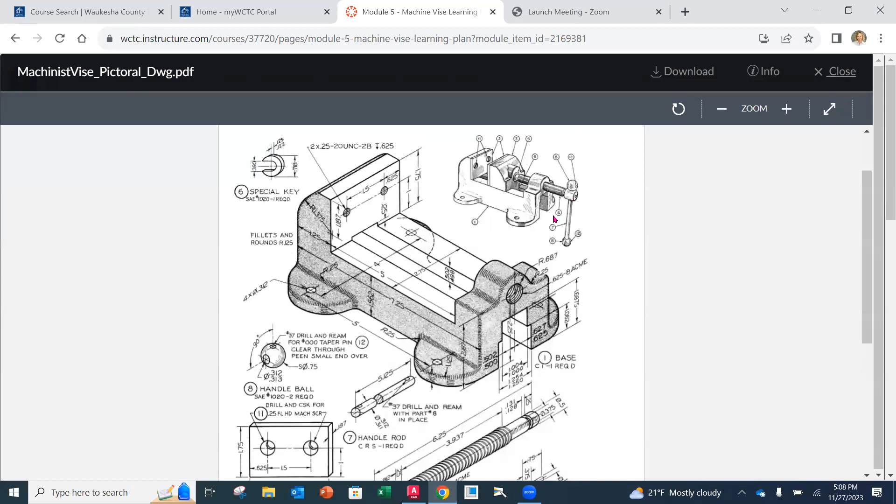But basically, I'm gonna go on the pictorial of the machinist vise. We are creating the assembly, and most specifically, all the models and the details for each one of the pieces to put this machine vise together. So using what you know about the ANSI standard, what you know about Creo, pulling this all together and creating a good set of working drawings so that this vise can be manufactured and assembled properly. Okay, so that is our goal.

The main thing here is applying good modeling techniques as well as the ANSI standard when it comes to dimensioning. So that's what we've got on top here. These are basically drawings without the dimensions on. So if you wanted to sketch them out, these are basically the views, so that you kind of know how to lay them out, and then you can add any notes and such that you want to it. And at times we might be looking back at these as well.

Additionally, these have the part number, the title block filled in with all of the material, which is also going to be on your pictorial drawing as well. Okay, so those are there for you to use as needed. As we look down here, it says you want to create the models and the corresponding detailed drawings. Each one of the models you need to save as the part number.

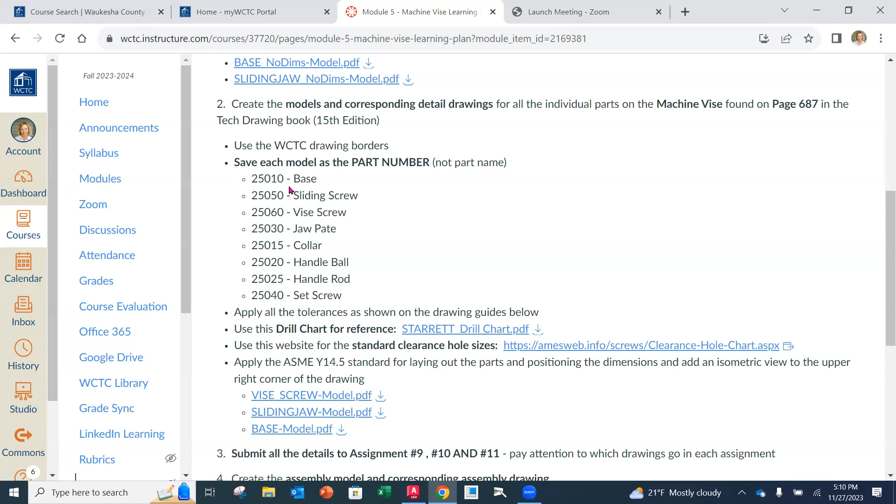So I'm kind of saying this again to you guys. Don't save it as base. Save it as 25010, okay? Because the title block is programmed to use that file name for the part number in the actual title block. If you call it base, it's going to have base where the part number is supposed to go. The base is going to be in the part name, which you'll actually key in when you pull that border in. So we've done a demonstration or two on that, but just make sure that you're saving each model as their corresponding part number here.

Okay. Apply tolerance as shown in the drawing guides below or in the drawing here. Something I want to point out is that there are some single place decimals and no place decimals on a couple of the dimensions on the machine vise. What I want you to do then is use the 2 place decimal in our title block, because that's the fewest number of decimal places and the least precise dimension. So convert anything that doesn't follow a 2 or a 3 place to just a 2 place decimal. Okay.

That's that stuff. There's a drill guide there. Oh, here are the 3 guides that I'm giving you. All right. So you've got the vise screw. You'll notice that all of the dimensions and everything are on here to the ANSI standards. So what you want to do is basically duplicate what's here for the most part.

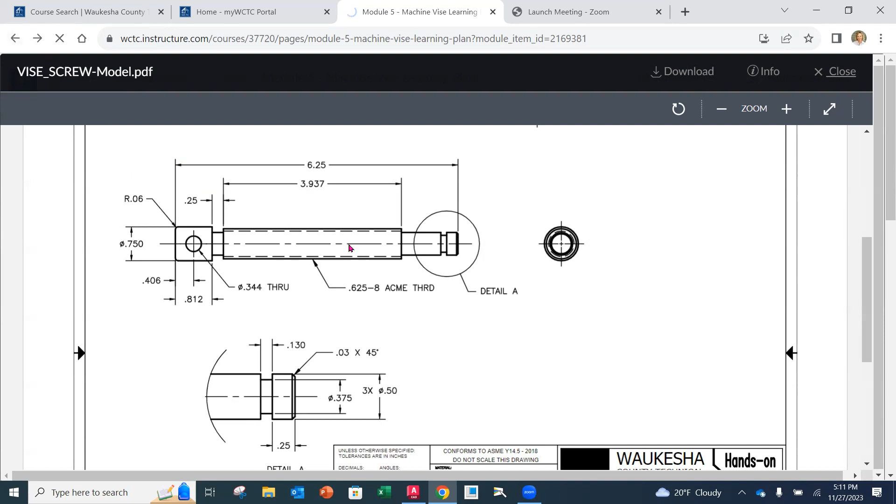You'll also notice that the next one that we have is the base and the sliding jaw. These are probably the 3 most complex parts in there model-wise. So I wanted to give you those because there's quite a few dimensions, especially on the base and the sliding jaw. There's also a section or 2 in there that you want to be aware of. But the other ones, you get to choose how you're going to do those. All right. But make sure you're applying the ANSI standards.

Submit all your details to assignments 9, 10, and 11, and make sure that you pay attention to which drawings go in which ones. All right. Create an assembly and a corresponding drawing that we'll get to once we go over assemblies, and submit that to assignment number 12. But assignment number 12 is not active at this time because we haven't gone over assemblies yet. So we're focusing right now on the details.

So, a couple things that I want to talk about. As I've been getting in some of the assignments, I want to be sure that we're all aware of a couple things. Number 1, I did have to add new borders out here. I apologize. I don't know why, but it must have been on my part.

In the background, there was something like a bearing block or something. And if you pulled it in, it would say there was an error because there wasn't this bearing in your working drawing or working directory. I think when I saved it, I mustn't have cleared my session and it was hanging out in the background and it was part of it. So I had to redo the borders, which was fine. It was no big deal.

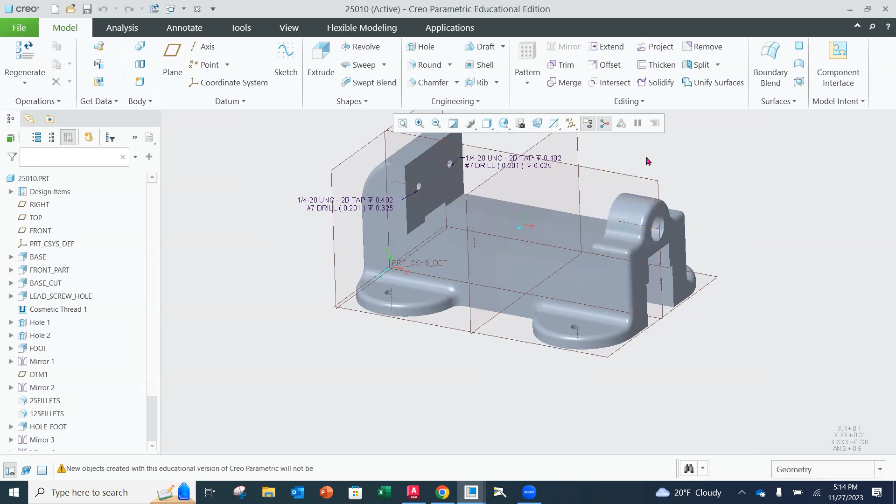And we're not going to model the threads so that they're the actual threads. You would do that, for instance, if we would 3D print this, and we'd want to have the actual threads in there. But for drawing purposes, we want to show them just in simplified format. So how we're going to do that is we're going to model the actual hole that's in here just like this. And then we are going to capture cosmetic threads: once the hole is in there, you go up to Engineering, and down below it's called Cosmetic Thread. And we're going to go to Standard Thread.

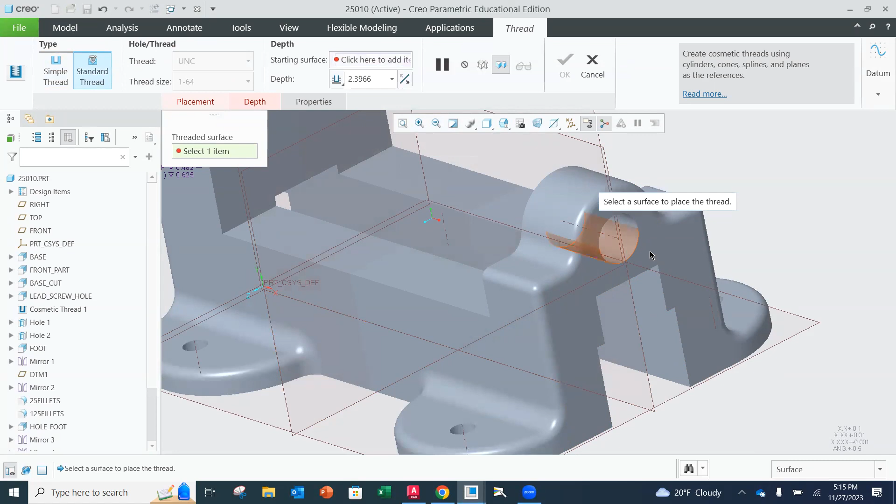Then it's asking us to click on the item that we want to create as a cosmetic thread. All I do is grab the face here. I left click on that face. And then it activates so that you can select the thread type. You want to just do a UNC. They don't have Acme in here, which is fine, but we're going to do a UNC because when we are in our drawing mode, we want to show those hidden lines for the root diameter of the thread itself. And then we're going to pick, this corresponds to a 5/8 inch. We're going to go down to a 5/8 inch 11 thread. Now I know this is not the accurate one, but we just want to show the simplified format of the threads in the drawing later on.

Then what we want to do is select the thread surface. Oh, wait, there it is. And then we have to go to depth. We have to select where it's going to start from. So depth is the next little tab there. And you can start on either side. It's going to start on this side. And then we're going to go to depth. Now we could put in the depth there, or we can change this to To Reference. And I like that better because then it's going to be on the back side. So if that depth ever changes, it's going to go along with the hole depth of that.

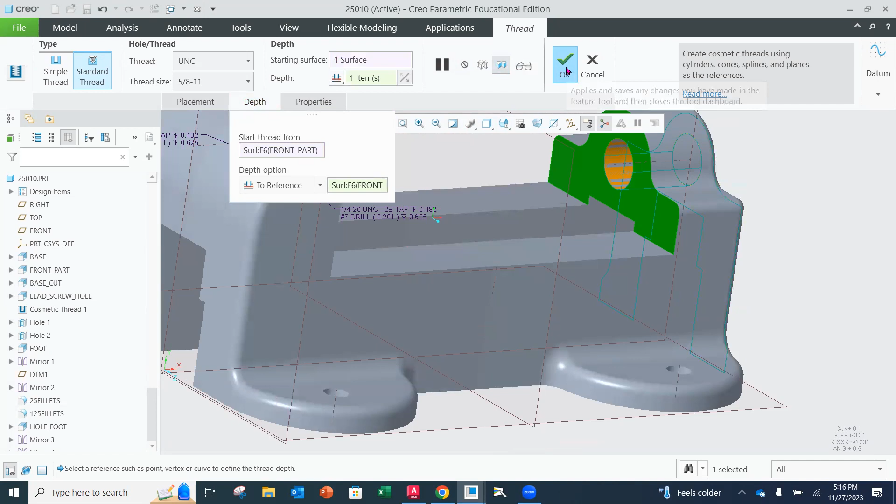Okay. And then that's it. And then we can hit okay. And now we've got cosmetic threads in there. Now you'll see that there are 2 diameters in there, ish, but it doesn't look very different. And that's okay, because the drawing is where it's going to actually show up. Now it will pull in the designation for the 5/8 11. You'll just delete that. And then you're going to create a note and point to it. Okay. We're going to point to it.

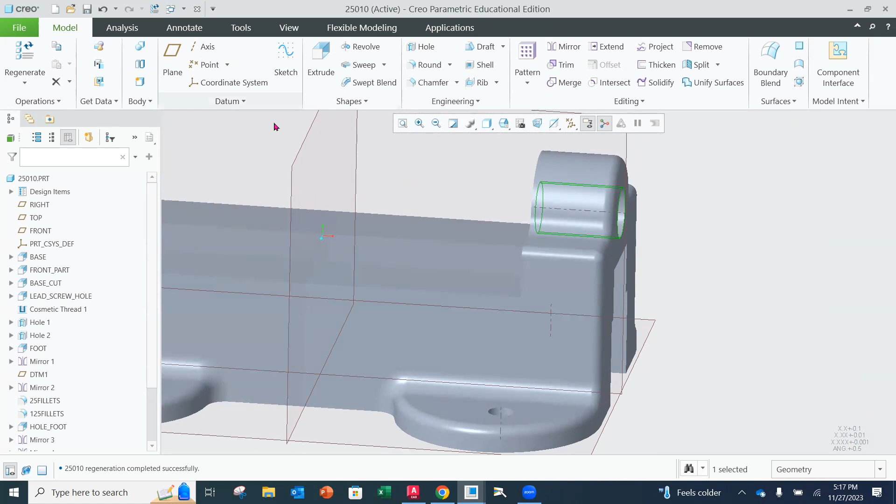So to do that, why don't we pull this in? I'm going to file save so that I'm in here. And then I'm simply going to start new. I'm going to keep it in the background here, which is fine, or you don't have to have it open. I have to change mine because I already created a 25010. I'm going to go _2.

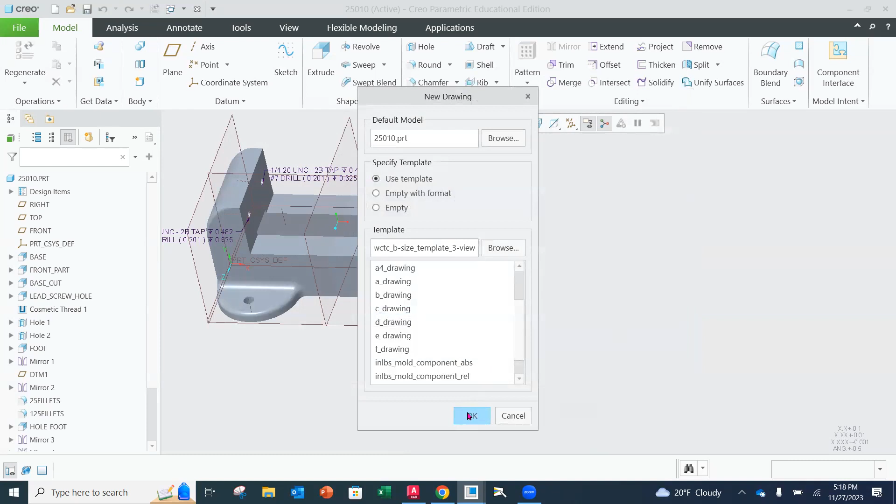You can click use drawing model file name, and it'll use that file name. And that's going to be what fills in the title block. Okay. So I encourage you to do that. I just can't because I already have one created. That's why. And the default model, so I can pull from that same model, use template, and then I'm going to browse to, I'm going to use my B-size 3-view WCTC, and I'm going to open it, and I'm going to hit OK. And I'm going to get something that looks like this.

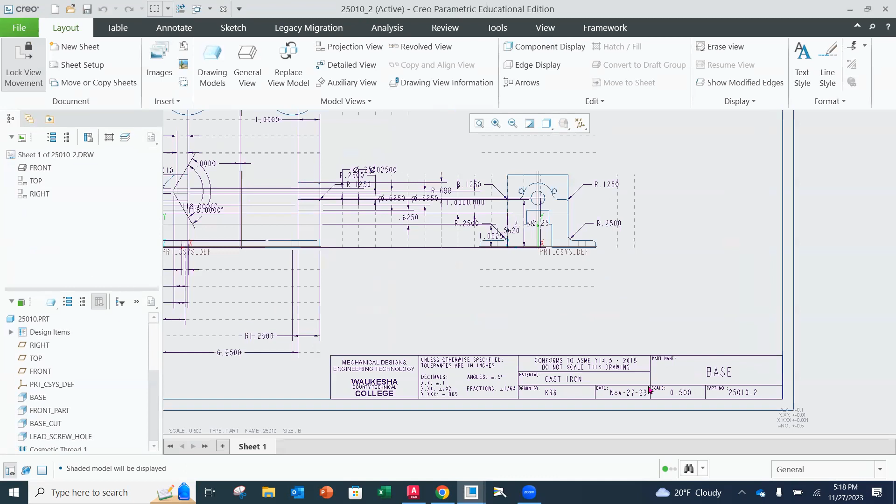Okay. Now it's prompting me to fill in my material for this one. Remember, all caps, cast iron. Okay. My initials, and then this is called the base. Okay. And now my title block filled in. Now, if for some reason you forgot you didn't have your caps lock on, you can just simply double click here and you can get right into that text editing mode, and you can change this if you need to.

So maybe some of you have already experienced that, but just so you know, it's not the end of the world. And again, down here, the part number is going to pull from your file number. Okay. So make sure that that's not base. I'll know right away if you didn't save it correctly, because base will be in here instead of the part number.

Now you're going to notice the way this is filled in on parts that are complex. There's like a ton of dimensions that come in that are like, oh, wow, I really didn't want that many in there. And no lie, I probably wouldn't either. So what you can do is we can go through and we can actually just delete all of these dimensions. And then what I prefer to do is pull in by feature as opposed to by view. So I'll show you my approach to this.

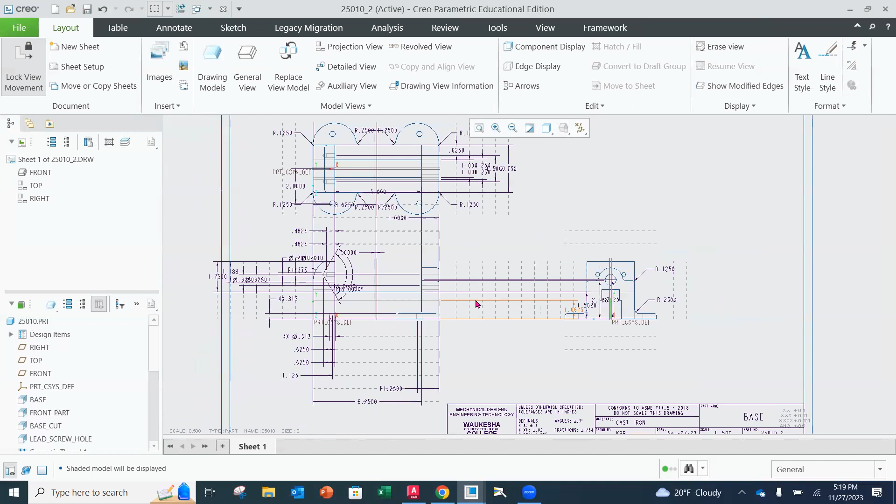So again, there's like a ton here. So I'm simply going to grab a whole bunch of them. They'll highlight, and I'm just going to hit delete. And kind of do the same thing. Some of them I might keep, like this 0.25 radius. That's fine. But some of these, I just know that I won't use anyway. And you can just go around and delete the ones that you don't want.

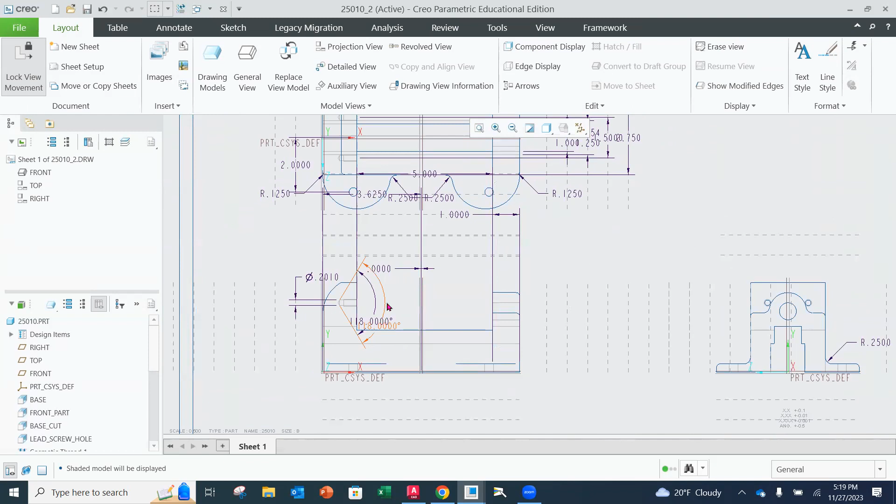And like I said, then I'm going to be pulling them back in by feature, because then there'll be fewer to deal with at once, and they're just easier to, oh, what? Yeah, I don't want to do that. Undo is my friend. Okay, I'm going to keep that one up there. Let me get rid of this one. This one. So this is, again, just to make it a little bit easier.

The other thing that I turn off is going to be all of my axes and planes. That cleans things up right away. And you do that just by selecting this on and off. And then you've got kind of a nice clean view here.

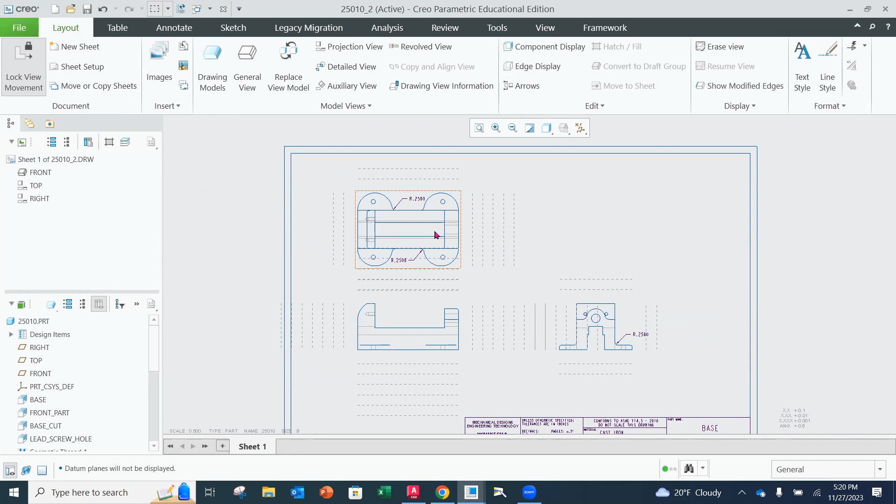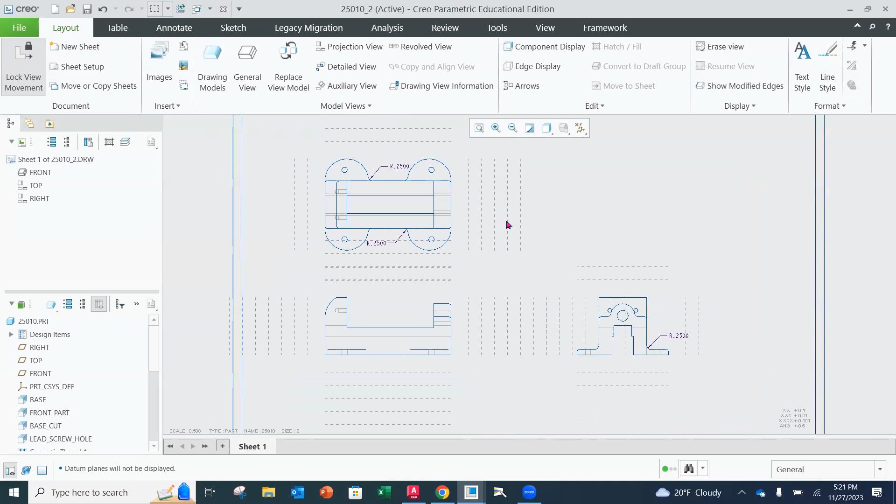Now, if you look at the non-dimensioned version of the base or the guide, you'll notice that we have the top view, the front view, the right side view, but also a section view over here. So to put that section view in, I wanted to show you, and then you'll notice that we also have these lines. You might wonder what those are. Those are just snap lines so that you can know where you can put your dimensions.

And the reason that they're there is because the standard says you don't want to be any closer than about a ½ inch away from the part. So it helps you to gauge not to be any closer than a ½ inch away from the part. Some of these are overlapping just because there were multiple lines and there were a lot of dimensions. So there's multiples in here.

So if you go to annotate, and you want to get rid of some of these, you can just select them and delete them, if you're like, yeah, they're kind of in the way. They don't have to be used, but they're a nice guide, especially when you're learning. But if you feel like they're in the way a little bit, especially there's a whole bunch of them down here, yeah, you can get rid of them.

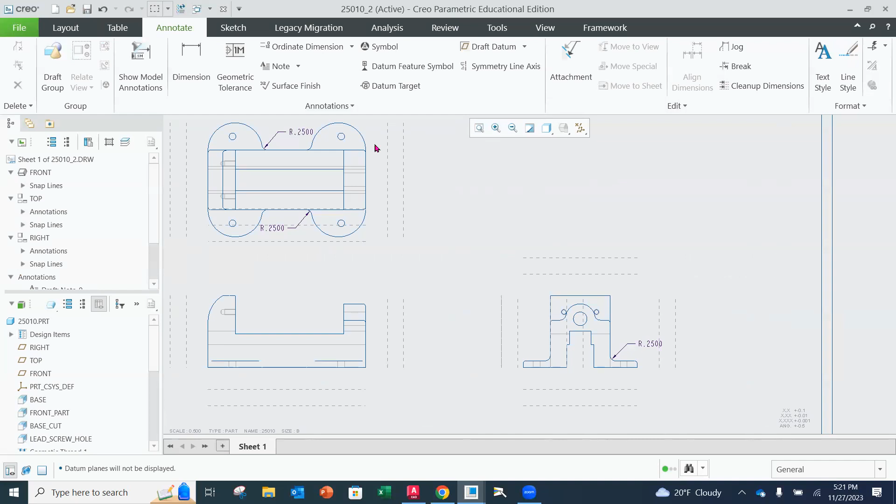Okay, so let's create our section view, because I know that that's something that's not super intuitive. So I'm going to go over to layout, and I'm going to add a projected view. So I have to have a view there before I can assign it as an actual section view. So I'm going to do a projected view off of my front view. And I'm going to left click and then just drag and then click again over here. It's basically going to be a right side view.

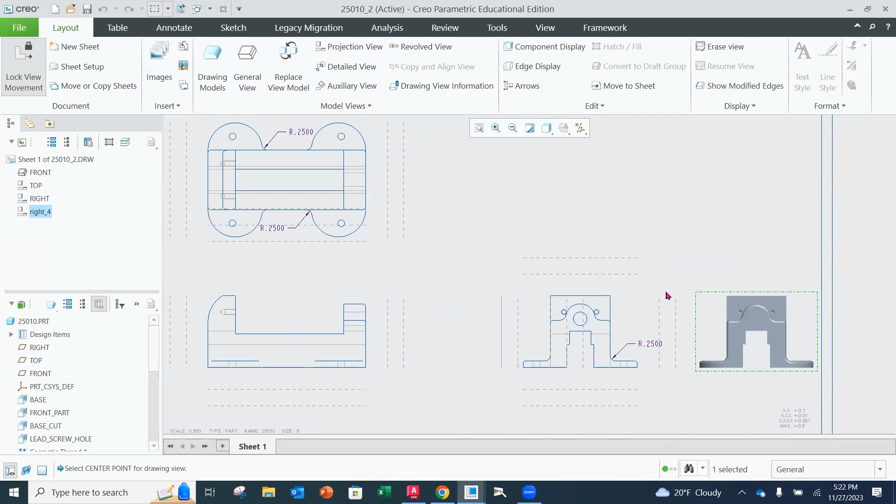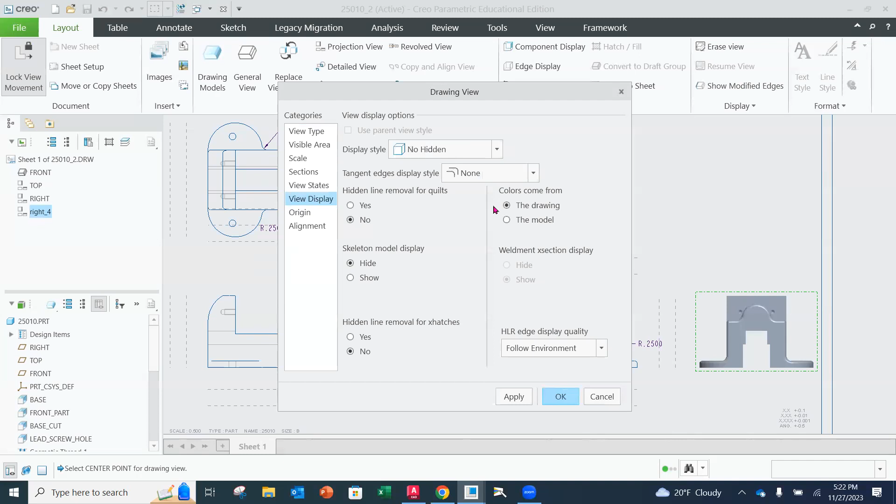And then I'm going to click off of it, reselect it, and go to edit. And it'll be the drawing view edit type of a thing. Then I've got the view display. I'm going to go up to no hidden lines in a section view. All right. If you have any hidden lines in there, that's not to the standard. So make sure that you remove those. Okay. So do no hidden lines. And then also we're not going to do any tangent edges. So you can do an apply and you'll see what that looks like.

Then what we're going to do is we're going to go to sections. Okay. To sections. And we're going to do a 2D cross section plus, now there's already an A in there because of the part. So I'm going to add a B. So I'm going to create new. And then it's going to ask me, I want it to be a planar single. I'm going to say done. Then up here, it's going to flash and it's going to say, what do you want to call it? I want to call it B. Okay. And then I need to select the plane.

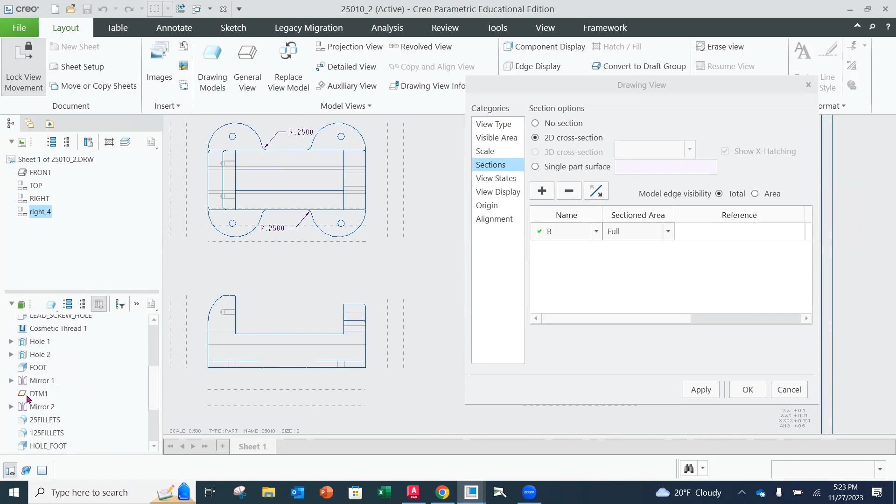Okay. Now, when I created my feet up here, I added a plane to the middle of my base. And that plane is going to be in my design tree here. It's datum 1. Okay. So I don't know if you really saw it. It was datum 1 right here. It's a plane. It has the plane symbol. Okay. Datum 1. And so it selected it. And right now it's calling it a full section. Okay. So everything is going good here.

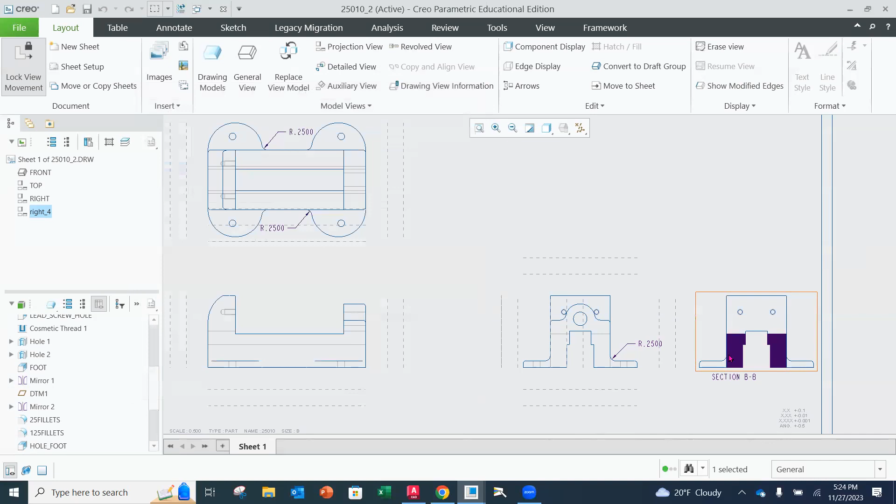And all I have to do is say apply. All right. So I just want to be able to see this view and I'm going to say apply. And you'll notice that it's changed it to a section B. All right. And I'm going to hit OK. Now, as I look here, these lines are way too close together. All right. So I can simply left click on those. Of course not. I can left click on them and you'll notice that this menu comes up.

Now you can go up here and adjust the scale if you want to, but visually, I'm going to do it again. Visually, there's this scale up button. If I just click that once, it's going to go a little further apart. I click it again, click it again. I just find this is easier visually to be like, oh, okay, that looks good. And then you don't have to try to figure out what is the scale that I should make that to. All right. So that's that.

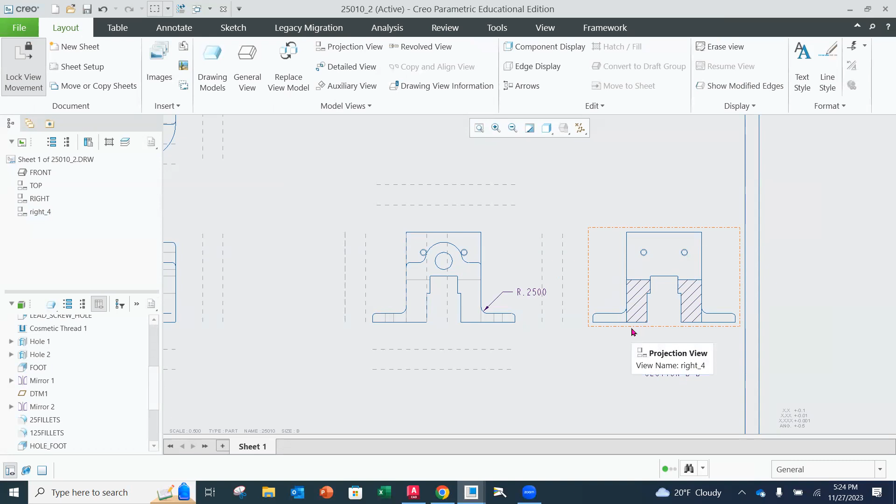You also want to move this section B down, so that you're going to be fitting dimensions in, and you want that to be like the label of the actual view. So even though it's stuck it here, don't leave it there. You're going to move it down below away from where other dimensions are, but like highlighting and labeling that view.

Now we do need to put arrows in here. All right. So on the layout menu, you're going to go to arrows and you're just going to click down in that. Actually, I think you got to click left and then right. There you go. I'm sorry, right and then left. Click on that view and then back. If you do it right after you create the section view, it'll know it. But if you do it later, then you have to like say it's for this section view over here and then click on the view where you want the arrows to be. And then it's going to put it through.

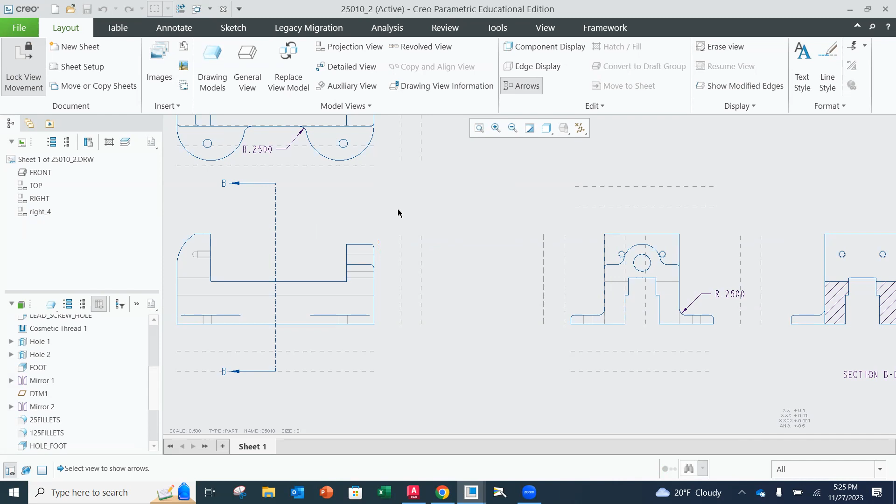You can also select on these. Oopsie, I'm going to re-highlight or get off of that. And I can select on this and I can move this down. See. And I can move my arrow and my B, my letter, however I need to. So once you start adding dimensions, you may want to move that around a little bit. It's something that you can adjust. So that's the section view for that one. Let me just take a peek if there's anything else that I wanted to mention about the base. Oh, the Acme threads.

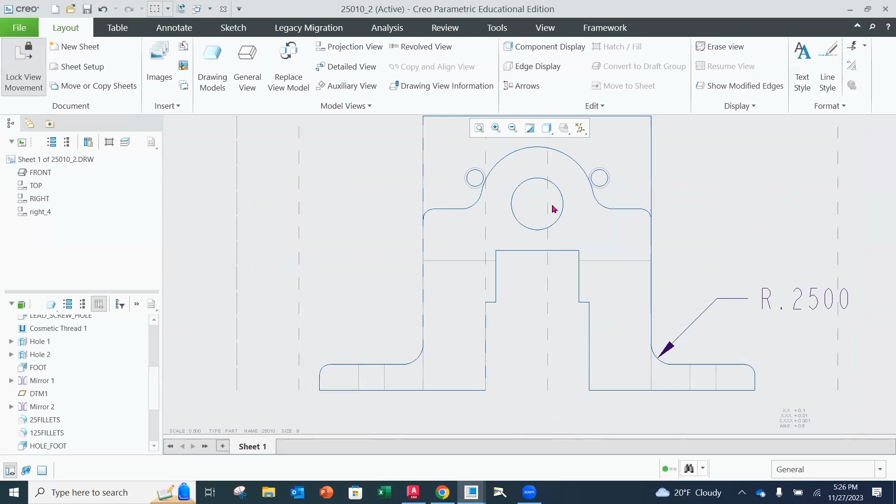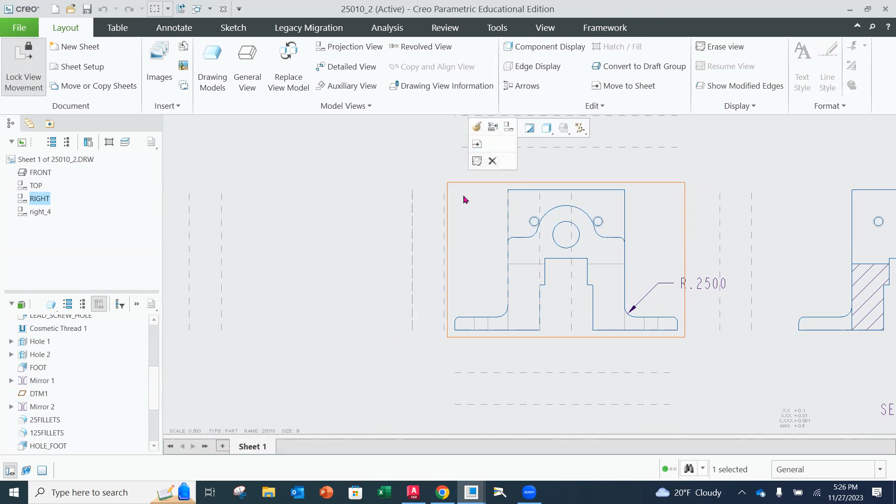So the Acme threads are here. For some reason, are they showing up on yours as you're looking, if anybody has it on the drawing? Yeah, mine didn't show up on mine either. I think they're just super small on here for some reason. They show up fine for the quarter 20, but I'm not sure why they're not showing up here. But if they don't, that's okay. Just make sure that you put the proper label on here.

And the proper label is going to be, let me go underneath my camera here because it calls it out on the thing. So the proper label is going to be this right here, 0.625-8 Acme thread. Okay. And then you just point to it as a note.

I see that there's a thing. Nope. Okay. I don't know what the nope was. I forget. All right.

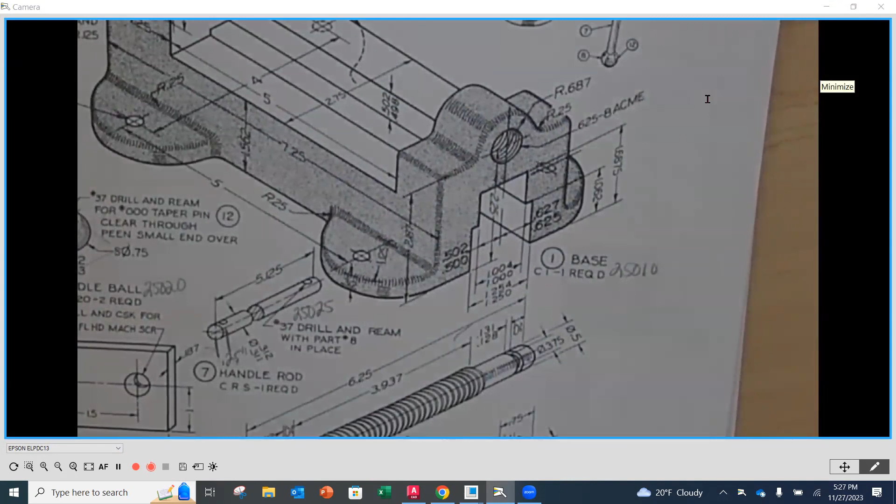Are there any other questions? Is there anything else on here? So that's what I wanted to kind of point out. Oh, the other thing that I want to point out too is when you're modeling the base, you're going to notice that you have some dimensions that you have to add here that have tolerances on them. Model them to the middle dimension. So for instance, on this one, it looks like if I do plus 2 minus 2, it would be 1.002 is what I would model it at.

So that when I add the dimension and I do my tolerance, then I can just do a plus 2 thousandths minus 2 thousandths, and then it's even on both sides. It doesn't have to be even, but it's just kind of a nice way. That way it's the same in both directions. And then you show the limits.

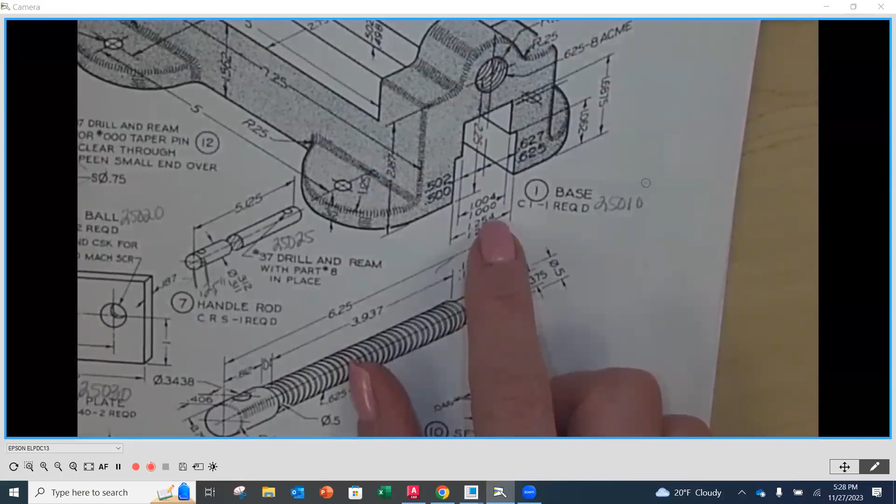Any questions on how to specify a tolerance like this or how to get it to work like this in Creo? Let me tell you, if you put it in as a note or you fudge the dimensions somehow, I can tell that you didn't do it the proper way. So I'll remind you. So make sure that you use a tolerance. Any questions on that at all? You don't know how to do that? One last time. Yep. Let's do it. Let me go back to Creo.

So let's say I'm going to put the dimension between here. So I'm going to go to annotate, dimension. I'm going to grab this one and then I hit control, hit the other one, and then middle mouse button right here. So now it's here as number one, a 4-place decimal, and it's at 1.252. And if you look at the outside dimension underneath here, it's 1.254 to 1.250. So plus or minus 2 thousandths, right?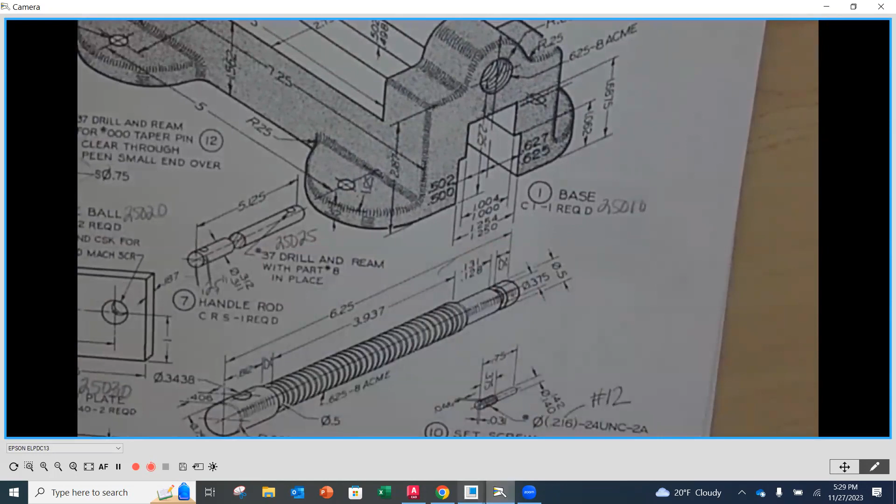So I'm going to go back to Creo. And I want to, first of all, put this to 3 decimal places. So I'm going to click on that dimension and it goes right into the dimension ribbon. And I'm going to go over to the precision. I'm going to set it to 3. Then I'm going to go over to tolerance, just to the left here. And now on the right-hand side, this is going to be my plus 0.002. And then I'm going to do minus, and it does this. I don't know why it does this, minus 0.002.

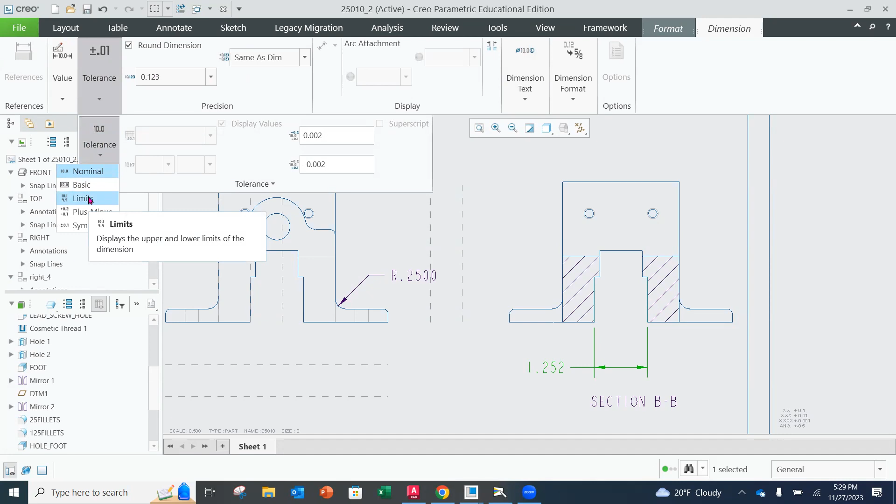Then I have to go over to the left-hand side in this box. It's going to go out again, go back down, and I have to specify limits. I don't know why it does that. Does that do it to you guys too? Like in and out? Maybe it's just a little glitch on mine. I'm going to go to limits, and now I have my limits set there. Did that work, Spencer?

Yeah. Right here. So again, you click on the dimension. What was that? Oh, you get the plus minus. So down when you're in here for the tolerance, you're going to arrow down and you want to hit limits. Okay. Yep. And then now it should do what the top value is and the bottom value. Oops, I got 2 more chat.

My tolerance sometimes is blue. Is that normal? Yeah, it'll do that on those diameter ones, and that is okay. Yep, I was going to ask the same thing. Yes, you're totally fine. The diameter ones will do that when they're horizontal, or sometimes when it's up down. I don't know why it does that. I can't tell you, but that's okay. Do we have to create number 11?

No, no. You won't have to do the quarter 20. It's like in the toolbox, so we can pull it out. Yep. The taper pin either. Yeah, I think it's 10 pieces, right? 1 through 10. Yeah. All right.

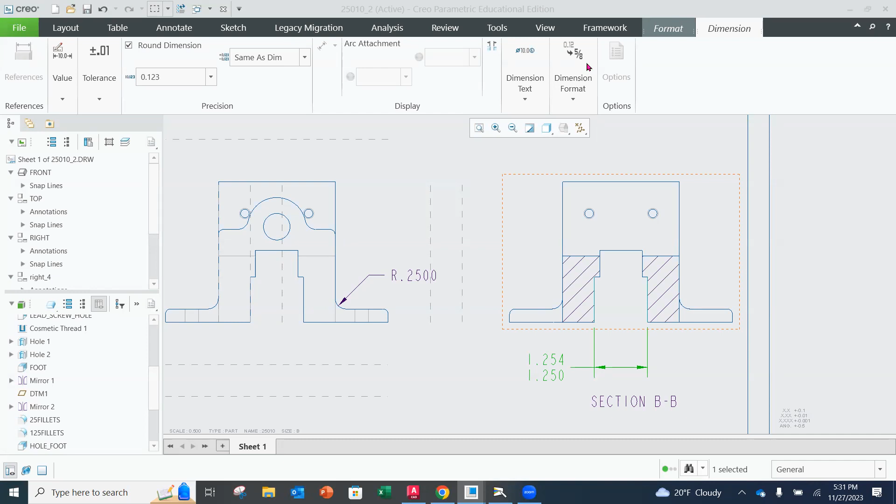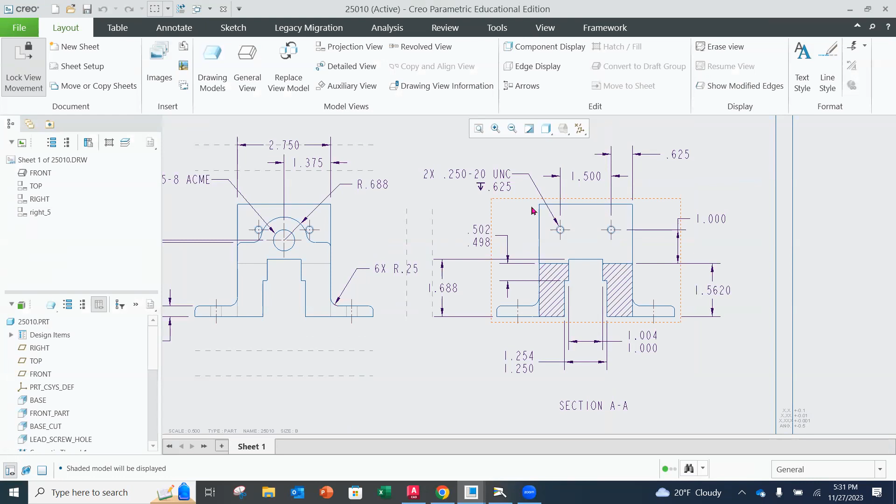Okay. Trying to think if there's anything else on there. Otherwise, we can always go back to it. I'm gonna open the drawing that is there. So as I'm looking, spacing is important. Oh, one thing I do want to remind you, I don't think it's on this one specifically, but if there's any references to drilling or reaming or tapping or any manufacturing process, do not include those notes in the callouts. I know they're on here, but that's not the standard ANSI callout. All you want to do is say it's a diameter of 0.25, okay?

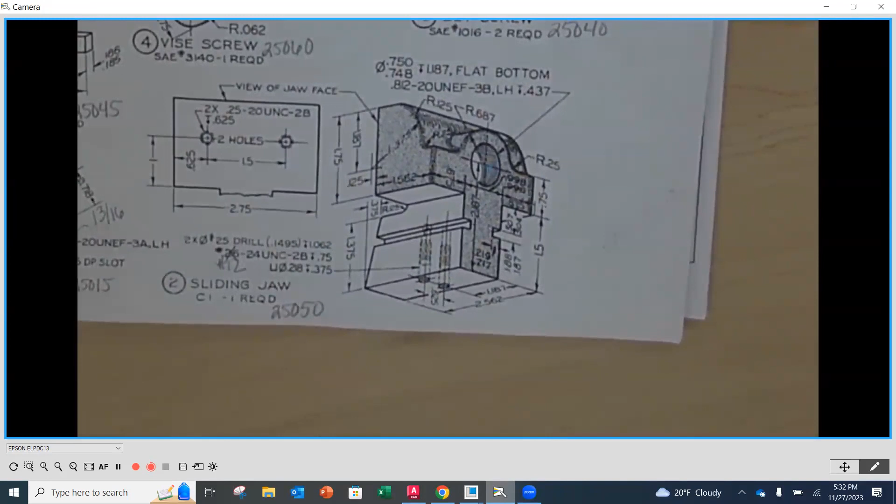Or for instance, if we look down underneath here, it says a diameter of a number 25 drill. No. Just say a diameter of 0.1495. Okay, that's all that you want to do. They might be able to drill it. They might not have to ream it. We don't want to dictate a manufacturing process. We're just telling them what the specification has to be, and however they can get it, they can get it. All right. So don't put drill or ream or tap on anything. Just give it its actual number that we're looking for.

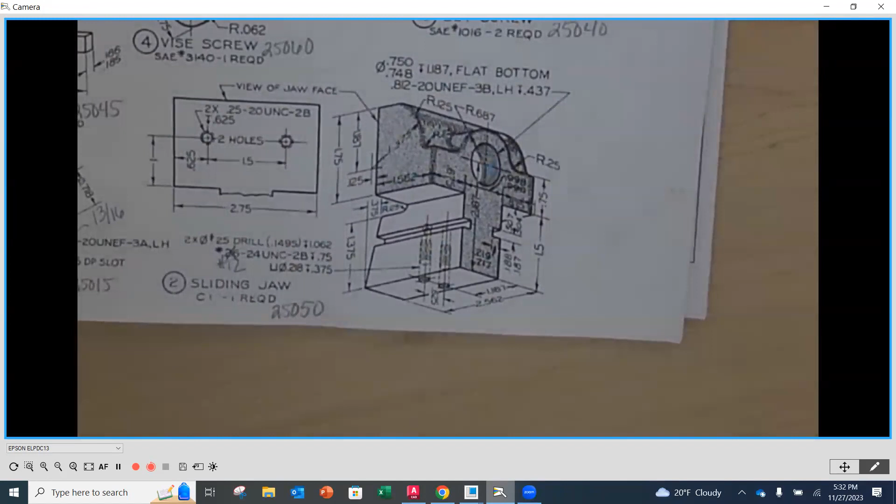Yeah, like here, and I did include the Starrett drill chart. Here they're calling out a number 37 drill. Well, it doesn't tell you what the diameter is, right? So what would you do? You could Google it, right? But in your module, I do have a drill chart in there for you to reference. So if you go back into that learning plan, you'll notice that there's a Starrett drill chart for you. So if you're wondering what diameter that corresponds to, do not put number 37 drill. Again, that's manufacturing process stuff. They can pick whatever it is.

So you would go to the drill chart and find the number. Here's the drill size, the number 37. They're usually smaller when they're numbers. 37 is 0.104. That's the diameter you're going to draw to, and that's the diameter you're going to call out, not the number of the drill. Okay. Any questions about that? All right. That's a standard. Don't do that. They used to do it like this to help manufacturing, but it was also at a time when you could predict what the actual process was going to be. We might not drill out the hole. It might be lasered. So we don't want to dictate that process for them.

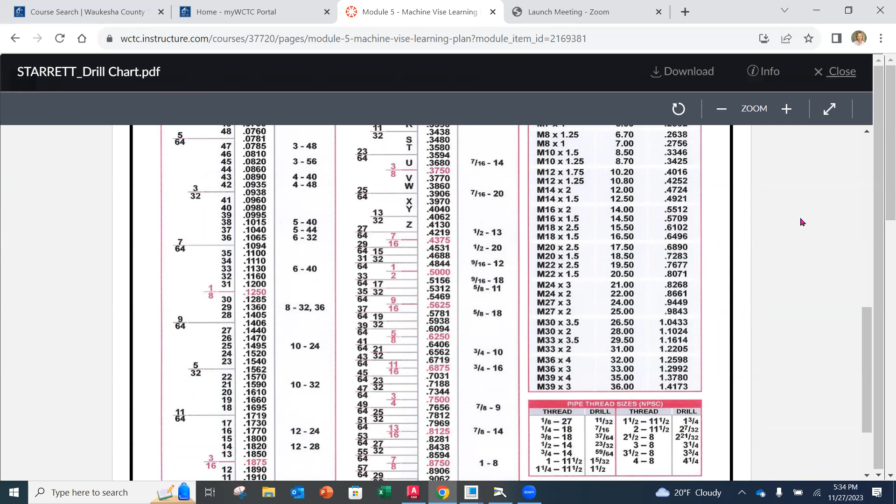Okay. Hey, Kelly, I have a quick question. Yes, Lex. Did you say you had a question? Yeah, I did. Can you hear me okay? Not great, but keep going.

Okay. When do you put through next to a dimension, and when do you just let them assume? Yeah, that's a good question. When do you put through and when do you not? I always put through if there's any question about whether it's obvious or not. If you don't put it, it will be assumed, but I kind of default to it if it's a more complex part and it's not obvious it's going through. If it's a real simple part where you can see it's going through, then I don't add it. Does that make sense? I just add it when I feel like clarity is needed.

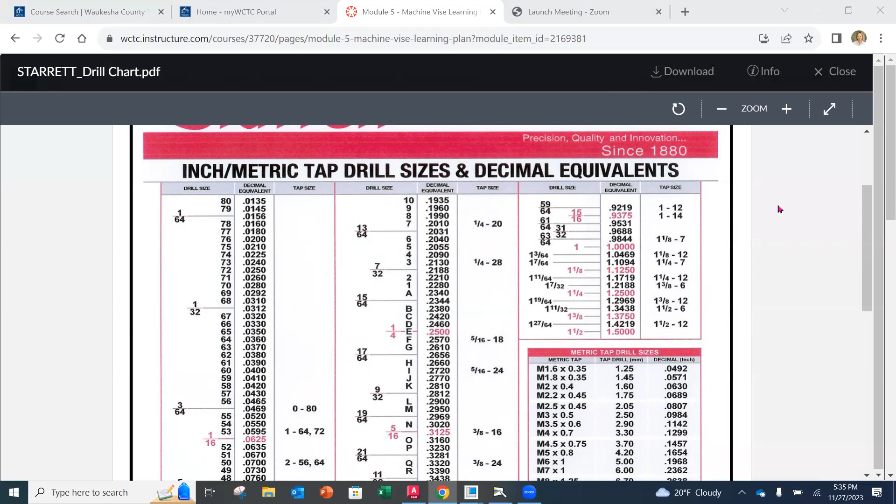Because sometimes, in that view, you might have a couple hidden lines over the top or a feature or two in the way. And you're focusing on that one, and I think it's a good idea to add it. So that's at your own discretion. Okay.

Okay. All right. Let me get back to my list because there were some other things I wanted to make sure we talked about. So I talked about the Acme thread and how to show that, using the WCTC borders, making sure we get the new ones in, tolerancing. We just looked at that, modeling to that middle number.

Oh, I did want to let you know that the last time we were together, on Tuesday, when we had the fire alarm and they closed down school for that evening, I did record what we did. I had a couple students come on and we did a demonstration of the set screw. And we also did a demonstration of the jaw plate. They weren't terribly complex parts, but I'm not going to re-go over those this evening. Okay.

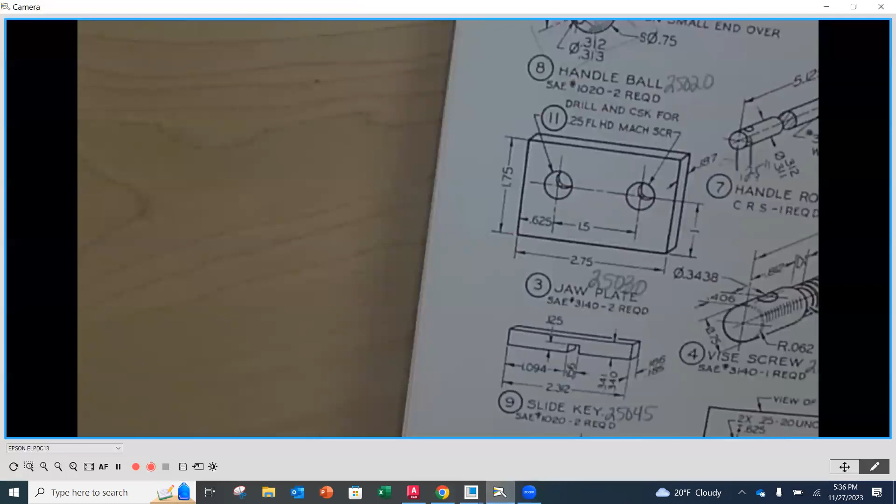So I did want to look at the handle rod. There was that, and we kind of looked at the base a little bit here. And then I would take any questions that you guys might have as you are working. So I'm going to go underneath, and I'm not going to say the keys or the drawing guides, but here we have the handle rod.

Okay. So I'm going to encourage you that if you're not watching me right now, come back to me, because we're going to talk some dimensioning and things that you want to keep in mind as you do these drawings. So first and foremost, whenever we have a long or any type of a shaft, if you're like, I can't dimension to a hidden feature, I've got to put a section through here. If you put a full section through here, it's going to hatch the whole thing.

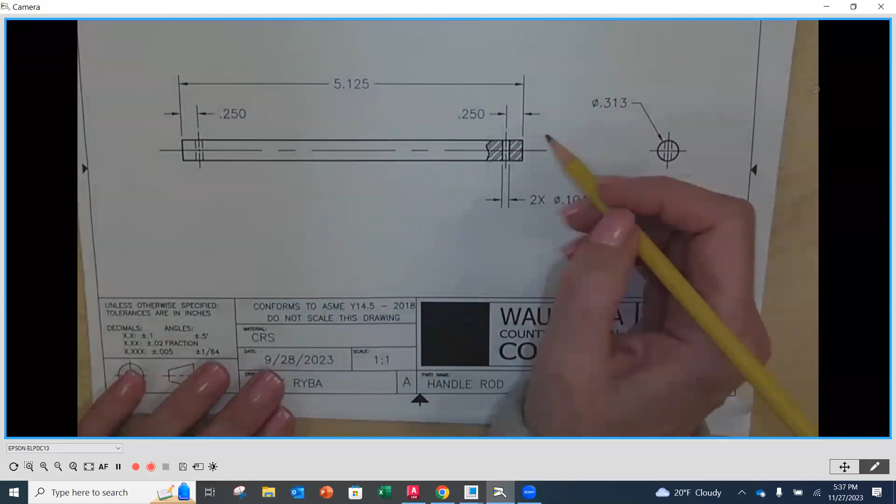That's illegal. That is against the standard. We don't do that on shafts, okay? We don't do the entire length. So what you're gonna wanna do is something like this, where we call this a local type, or a breakout. In the view, you would click on the view, and instead of doing a full section, you're gonna do a local section, okay? A local section. So I'm gonna show you how to do that in Creo, because that is something that's a little different.

So let me go in here. This one I'm gonna open up. 25,025. Okay, I don't see that I have a part there. So good. So I want to create the drawing for this. So I'm going to do file, new. I'm going to create the drawing, use the drawing file. Okay, we've got that. And I'm going to use an A size, 2 view is fine. And then it should be good.

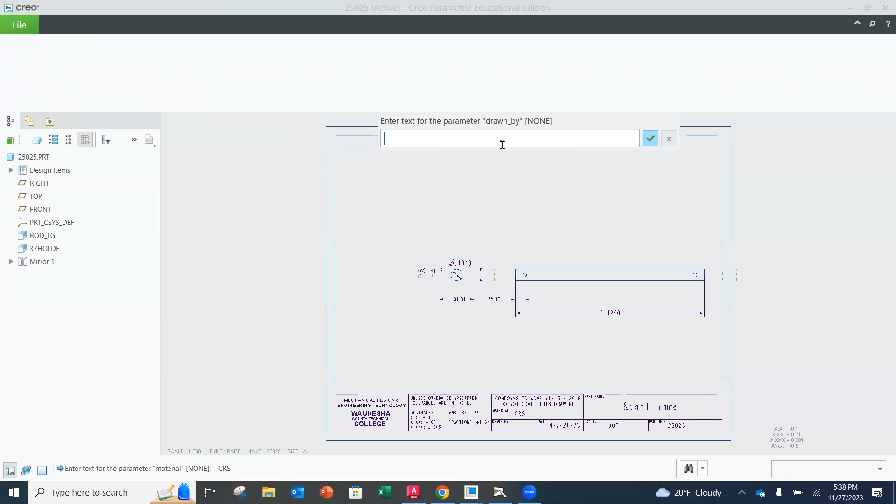All right. Now, of course, it doesn't come in the way I want it to, but that's okay. We're still going to demonstrate it. So material wise, I want cold roll steel. Parameter, K Ryba. And this is handle rod. There we go. So here again, notice that my part number came in as my file name. So make sure that you save it as the part number. And then I filled everything in here.

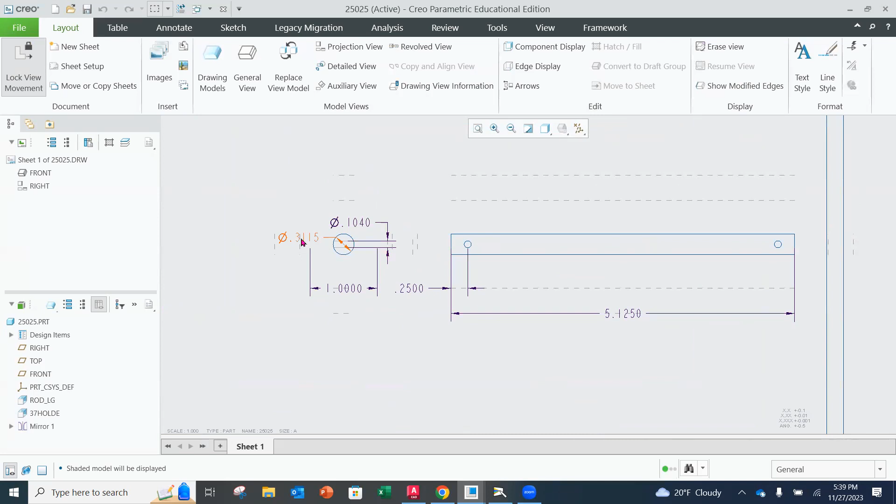Now, a couple of things. You'll notice that my dimensions are over here. They're coming in. So in this case, this isn't too bad, right? Here the dimensions come in on a simple part. It's kind of nice. You don't have to go in and redo it for each one of the views. You just might have to move it to a different view, for instance, and then get rid of the dimensions that you don't need. So on the simple ones, the ones that aren't as many features, it'll pull these in and you can work with what's there and move those around.

But let's add a little local view over here, even though in this case, the way it oriented, I wouldn't need it. So what I'm going to do is select this view. I'm going to edit that view. I'm going to go to sections, 2D. I'm going to add, and I'm just going to call it a planar or single. Done. We're going to call it A. And I'm going to select a plane, and I think it would be the right plane that it would go through.

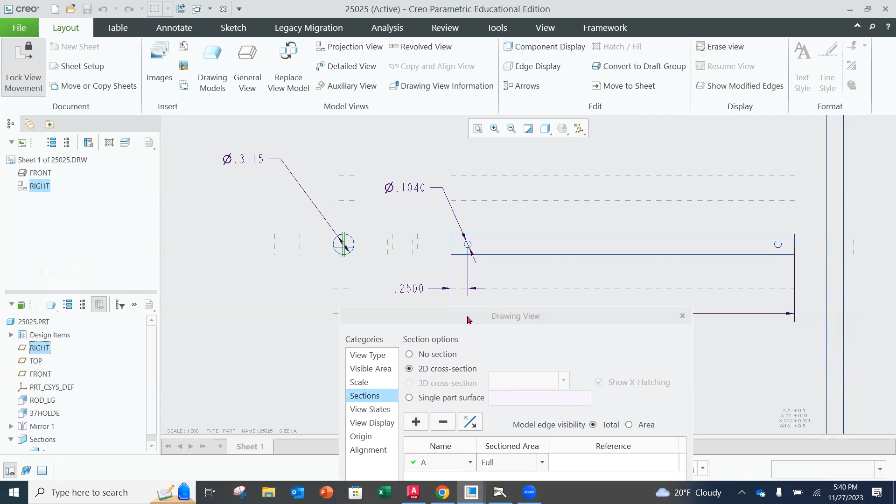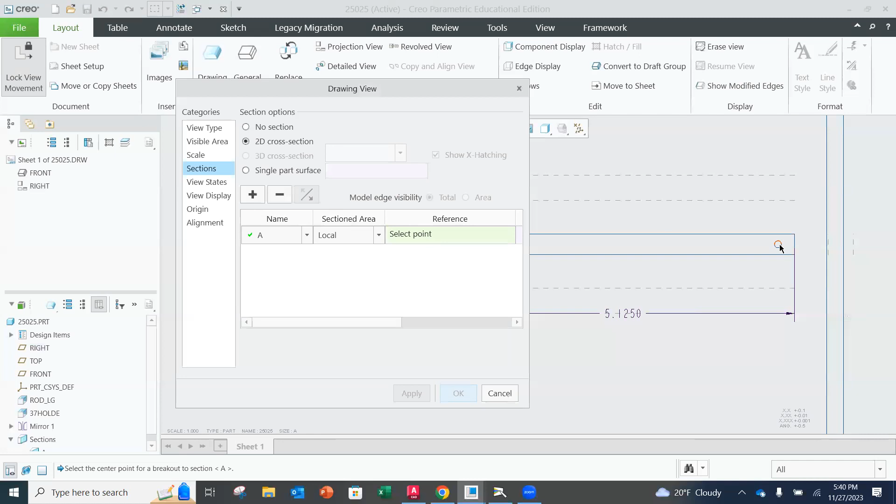All right. And you'll notice here that it says a full section. That means it would do a full section across that entire length. I don't want that. Instead, I want a local section. So you're going to go to the arrow down there, and there's local. And now it wants you to select a point. So you're just going to select a point here. And now it's telling you down here, we're going to make that spline around the area, just like we do for a detail drawing, to go just in that area that we want.

Don't close it. And then just middle mouse button. And then, let me see, create points of the spline for the pass through. Yep, I did that. Do I say apply? There we go. And then you can hit OK. Now, this is that same thing as before. If I click in there, I got to actually unselect the view first. Then I select in there. You can increase this, increments at a time.

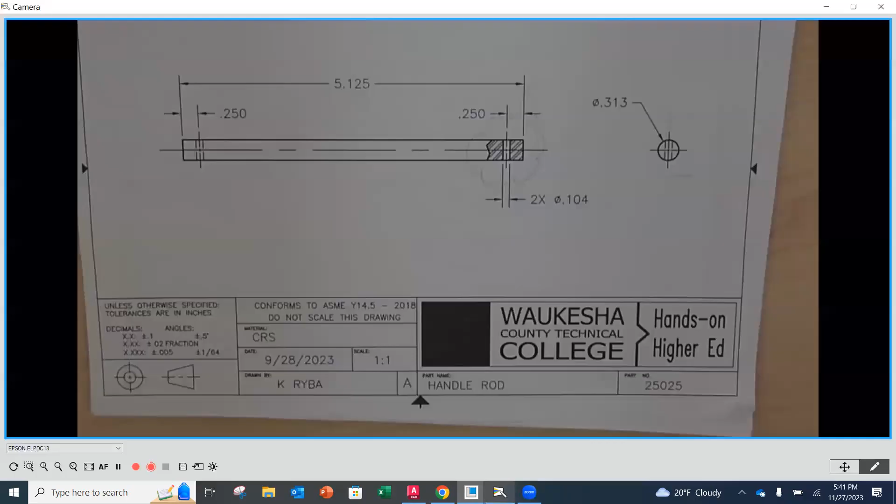Now, in this case, I wouldn't have to do it the way that it oriented it, and I didn't want to mess around with changing that orientation. But if it comes in like this, or if you want to use this type of a view, you would have to create a local section, or this can go for any other places that you find that it would be helpful. Josh.

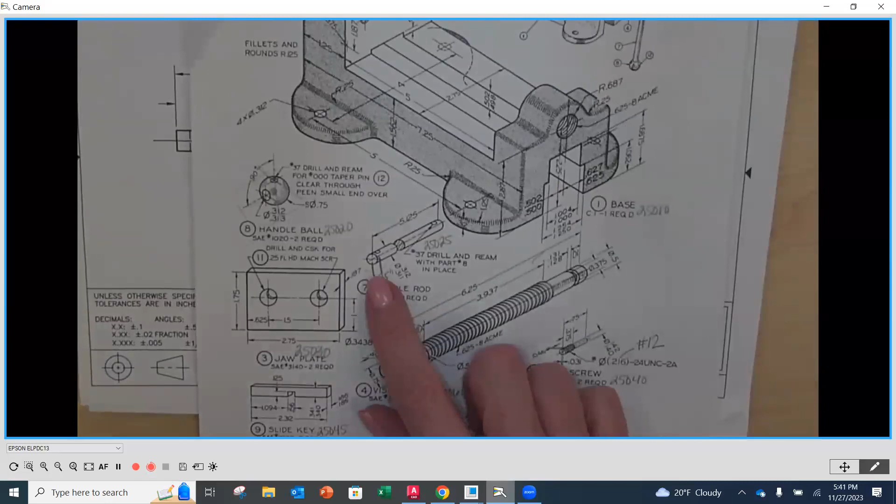There was no dimension on there, right? That was me as the designer. That's the dimension I chose. So on here, you're going to notice they don't give you a dimension from the edge. But what it is, you'll go to where the ball goes on the end. Our part is going to go through the larger hole, and then a pin is going to pass through that hole. Does that make sense? And so when you look at the diameter, this is 3/4 diameter.

So if you wanted to do 0.375 or something less. I just didn't want that handle sticking out of the end, so I picked 0.25. You could pick a dimension that you want, as long as you don't have it sticking out of the top or the bottom. Does that make sense? Yeah. What was the

Which one? This one? On the ball. On the ball part? Yeah, number 37 drill. What size is that? Oh, so you'll notice that here is the ball. This rod right here is going to fit through here like this, okay? Then this diameter, this number 37 here, there's going to be a taper pin, and that's just a pin that is going to go all the way through here to keep the ball on the end.

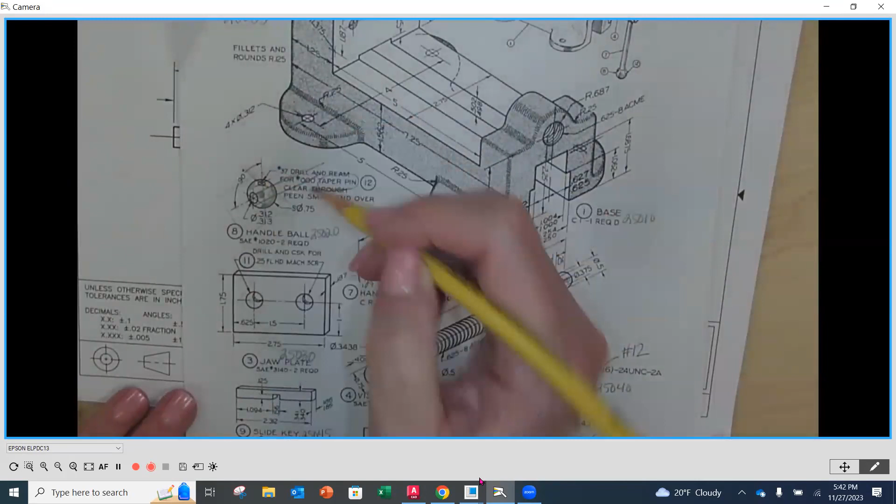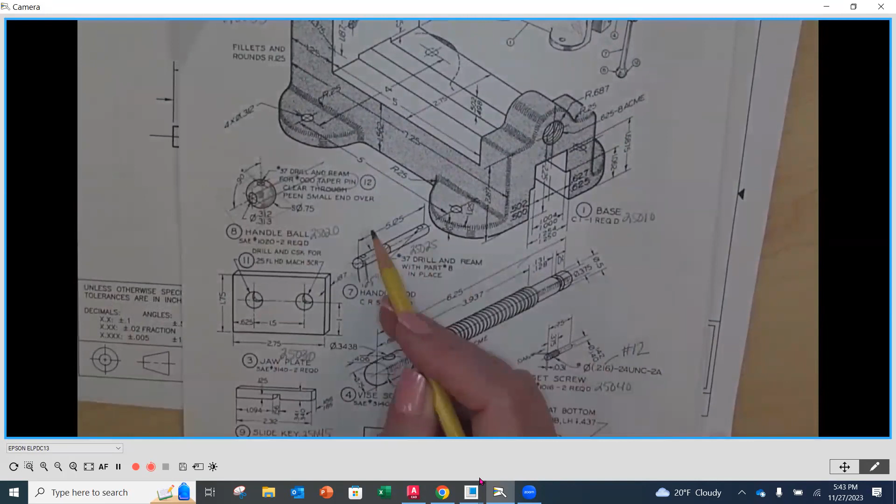The taper pin is going to be a standard part. You don't have to draw that. The only thing that you're going to draw is going to be the sphere and the handle rod. And then there'll be a sphere on this end, a sphere on that end, and then they'll be pinned in two places. It's hardware, so we're not going to draw it. Other questions? Good. Okay.

Now, as you look at the Acme thread along here on our vise screw, this is going to be done the very same way that we showed it here. You're going to create a cosmetic thread on the outside to be as long as it needs to be here, okay? So you'll create the outside diameter as it's solid. That's going to be the 5/8 inch, and then you're going to do a cosmetic thread for that length. Okay.

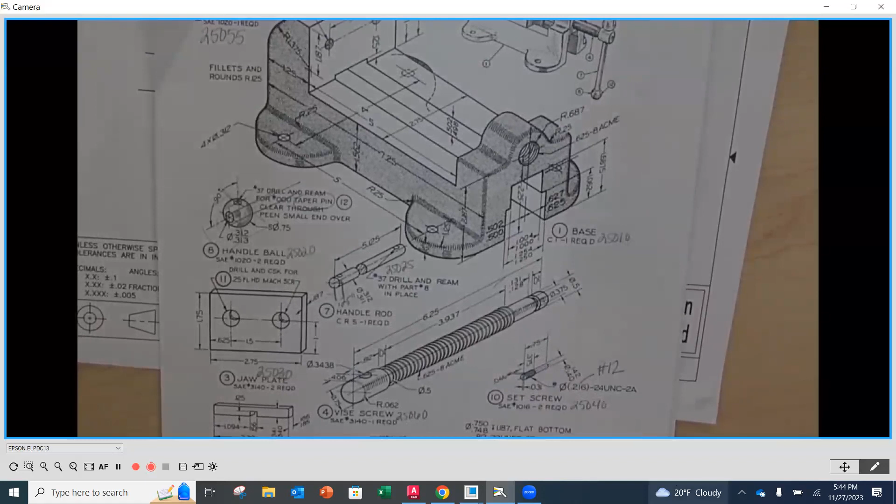The other things I wanted to mention about the drawings. As you create drawings, I want to make sure that you create an isometric view up in the corner for each one of these. When you do that, most often you're going to create a view, and then it's going to want to put the scale is equal to. As I mentioned the first time we were together, delete this, okay? You don't need that scale up there. The only reason for the view is for clarity. Having the scale underneath it is accurate, but get rid of it because it's just text on a drawing that's not really needed.

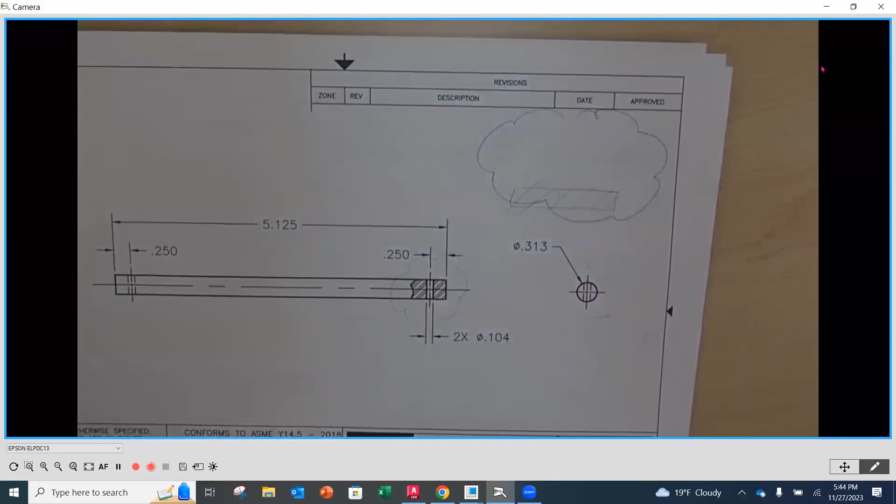Also, make sure that you put it in no hidden or in solid with edges, okay? Those two are the best. If you do any of the other ones, then it looks kind of weird and washed out, or you don't see the edges and it's missing stuff. In wireframe, it ends up being too many lines to try to figure out. So one of those two is always the best up in the corner there.

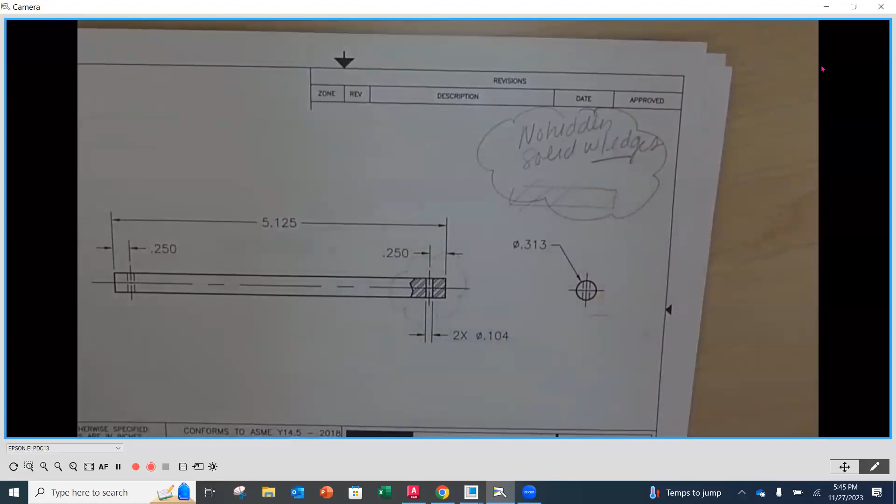Okay. So put this up to a 2-place decimal. If you see any other ones like that, you want to do that very same thing. Model to the middle and add the tolerances, add an isometric. Don't reference the manufacturing processes. Don't full section along the shafts. We did that.

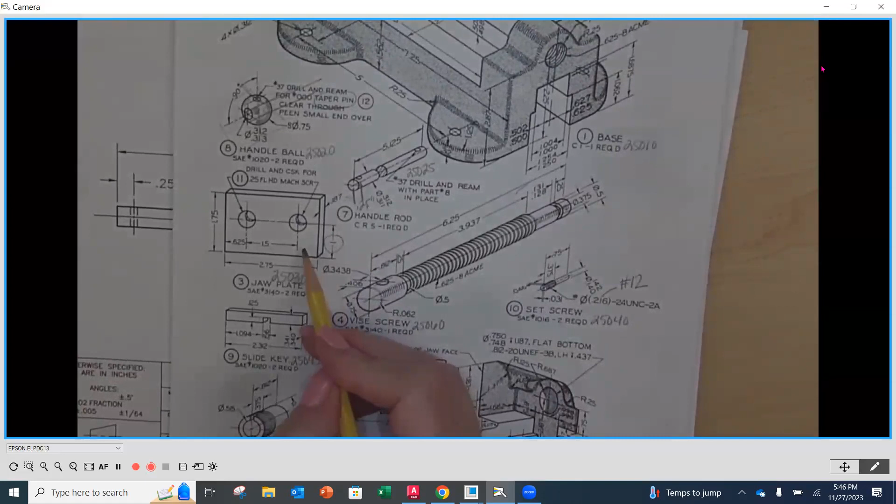Oh, don't dimension on the part. I've caught this on a couple people's. Okay. So make sure that you're not putting dimensions like you see them here. Don't put them on the part. I know you see it here, but remember, we're applying the standards. And also don't dimension to any hidden features.

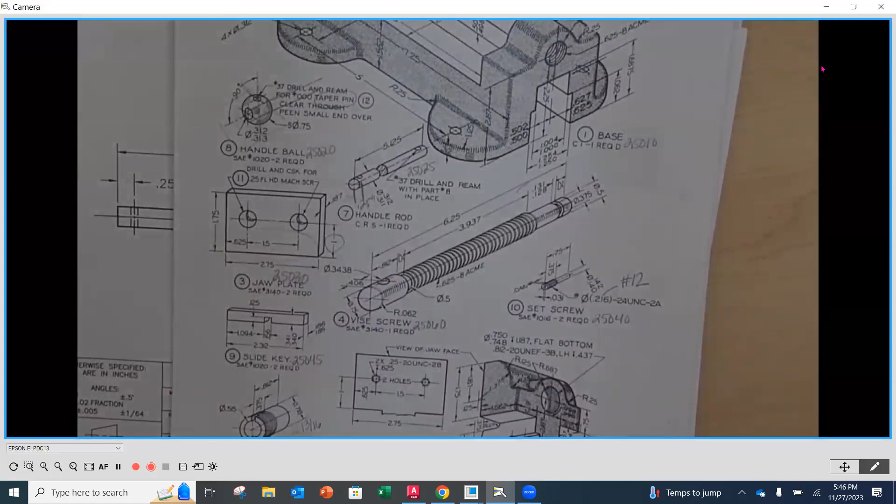Overall, what's come in so far, I think looks pretty darn good. So keep it up. And then, if you have any questions as you're working, let me know. Remember, when you're handing it in the first time, we're still practicing. We're still getting used to what are the standards, what are the rules, all that kind of stuff. And so I'll make notes. And if ever something that I put in doesn't make sense to you, let me know.

Remember, you can always make the corrections, hand back in. This is a learning process. I don't expect perfection. Always put your best foot forward, but also know that I'm not expecting you to have everything down exactly perfectly. Okay.

And use your references. Use chapter 11, I think it's chapter 11 and 12 in your tech drafting book. Ask me. You guys did this stuff in tech drafting. You learned the rules back there, so you can use that stuff as well. So right now, are there any specific drawings that anybody's working on that you want some insights on? Remember, you have guides for the vise screw, for the base, and for the sliding jaw, which, like I said, I think are the most complex.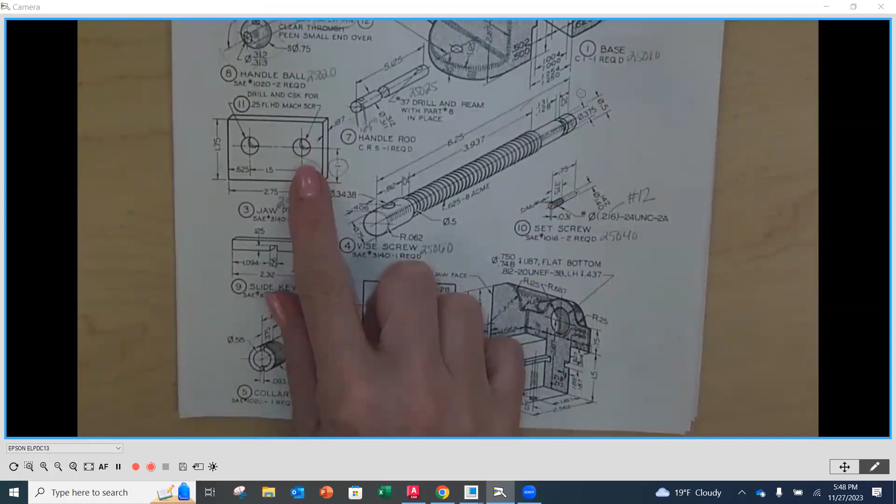Yeah. I just need to know the depth on that jaw plate for that countersink hole. Oh, for the countersink hole. Yes. So for the jaw plate on the countersunk hole. So let me look. So I'm going to go to open. That is number 25030. All right. So these I put in as the hole wizard, which I'm like averse to. So these were in as the hole wizard.

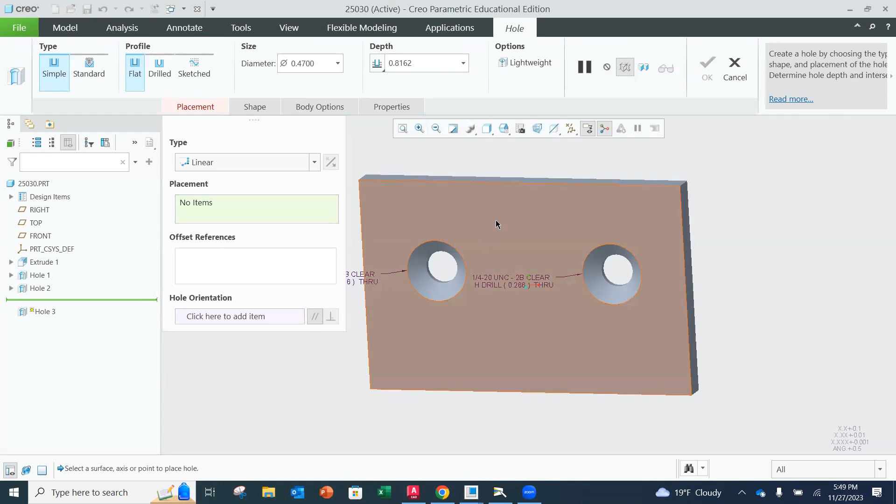So I added a hole on this surface. I did a standard, and you had to pick your thread first. So this was a 1/4 inch, right? So UNC, and then we needed it to be the 1/4-20. Okay. And we want it to be a clearance hole for that. And we want it to be the countersink. Okay. Straight, standard, straight, countersink.

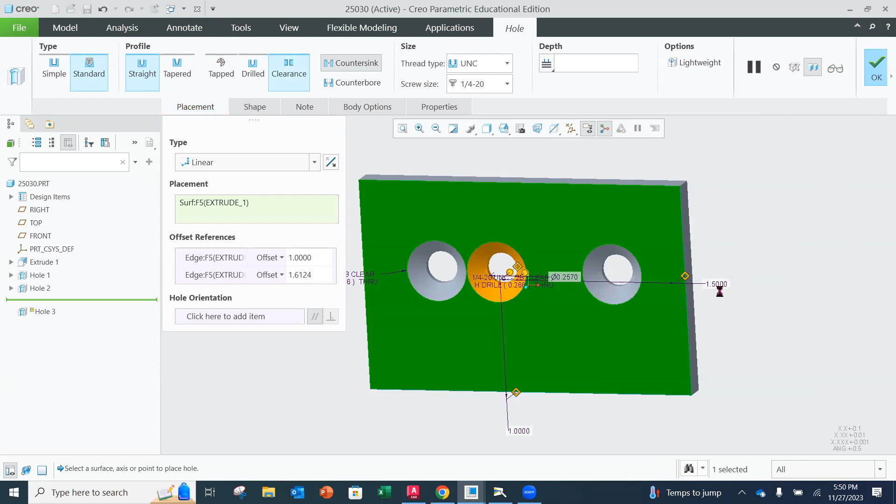And then the placement, we need to add the dimensions. So you have to take these broken arrows and put them to wherever it needs to be, 1 inch, and then over here, I'm going to say 1.5. Okay, so it's in there. And then now you'll notice that it naturally creates it. Sometimes it'll go off the countersink and you'll have to just reselect it and then it'll go back on.

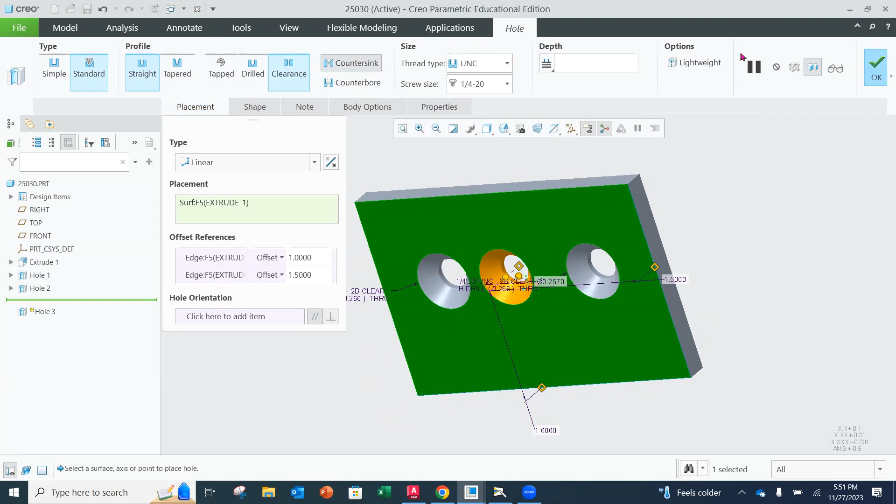Oh, we don't like this. You don't. As long as you have standard, straight, clearance, because that'll make the clearance hole then for you, countersink, and then you pick your fastener size over here. Yep. And then once you get it to the point, and like I said, sometimes when you're doing your dimensions, this will toggle off countersink, just toggle back on, and then you can hit your okay and it's in place.

Now, the way it calls it out, you'll see it's going to call it out like this. You have to change that callout. Okay. Because we're not going to say an H drill, blah, blah, blah. Because we're not telling them how to do it. We're just going to say 1/4-20 UNC-2B.

Oh, no. I'm so sorry. We're just going to do the countersink callout, 82 degrees with a clearance hole of whatever that size was. Yeah. Because this is calling it out per the fastener, and that's not a fastener. We're calling out the countersink for it. Okay. And it's an 82 degree, which is the standard.

And if I look, hold on, let me look at my drawing. Let me see how I called that one out. Open, just so that you can see it. Yeah. So diameter of 0.266 through, and then it's a diameter of 0.507 because that's the dimensioned diameter by 82 degrees. And then the 0.507 is the outside diameter, the larger diameter. And then it's 82 degrees down.

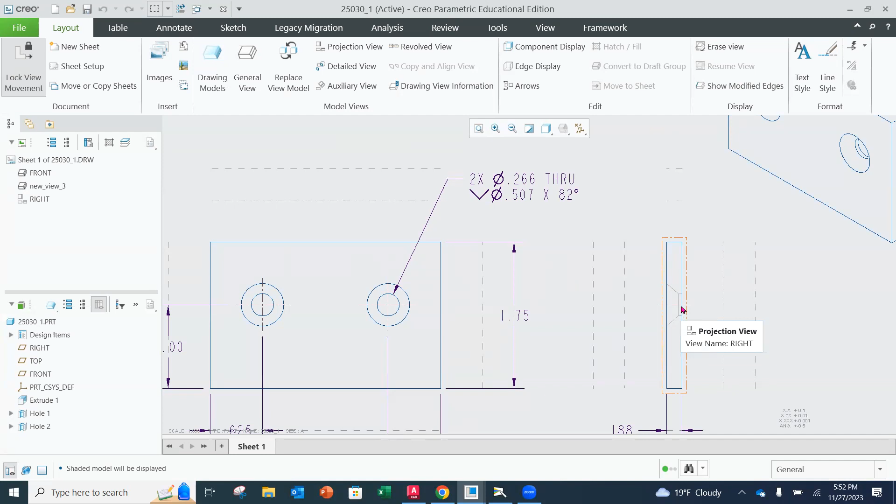So then you don't have to worry about how deep that is. And then it'll automatically fit the head of a flathead screw. Okay.

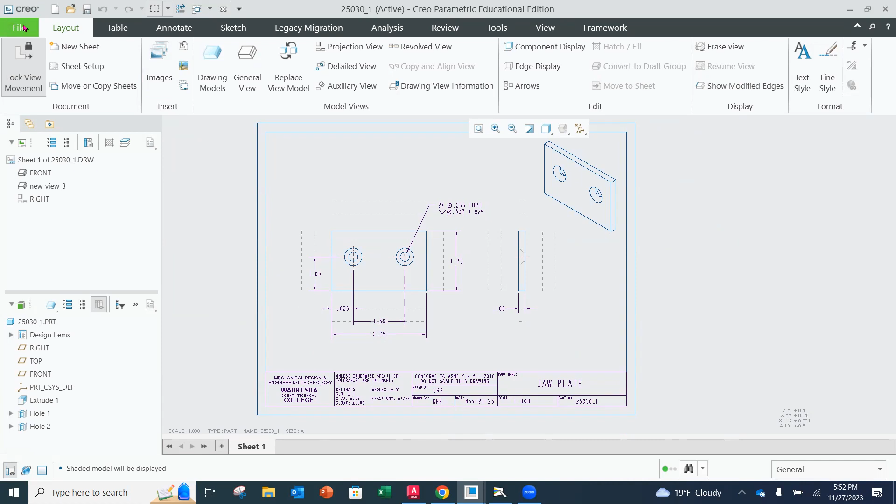Other questions? As long as we're here, this is a good reminder again. The last time we were together, I know I only did this once, so I want to do it again, to print this and to make your PDF, okay? Very slight difference than what I had anticipated. I talked to Tom and he's like, I don't know why this is, but it is. We have to go to the file, save as, and then we need to go to export, okay? And then once we export, we pick a PDF.

And then you want to say export and okay. There we go. And then it'll make a PDF for you. Okay. And then you'll notice that all those extra lines are off of there. And everything looks really nice and crisp and like an official drawing, which is nice. Okay. Oopsie. So it's just a slight difference: rather than doing it out of the print or the plot, doing it out of the save instead. Was the export.

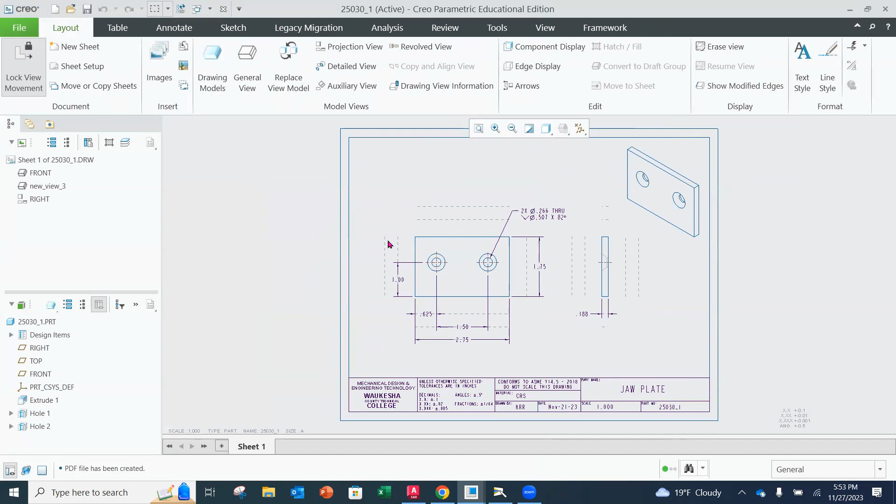Now I'm going to go underneath here. Are there any specific questions or drawings that you have? Oopsie, did I accidentally go out of here? Are there any specific part numbers that we want to look at drawing wise for any of these listed? It's your time. Say, I would like to see the drawing for, how would I dimension this? Or how would I approach that? At the moment.

Your tolerancing is being weird? Okay. You can't put it in limits. Okay. So when you're in there, make sure, whoopsie, let me pick up one that's a dimension. Well, I'm going to see first. It should be through my templates. If you have my templates on, you should have that available. So if I click on one of these dimensions here, and I want to go to tolerance, okay? I'm first going to set my tolerance here. Did you do that already, Hans?

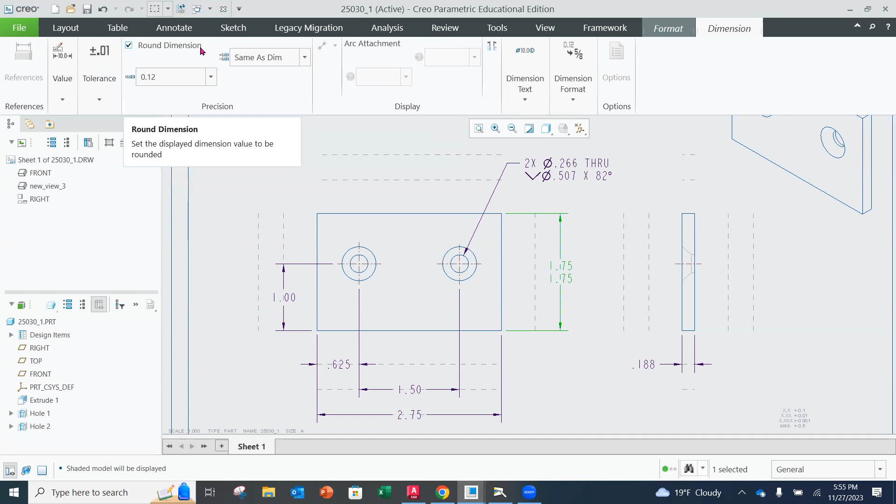What doesn't? Tolerance doesn't? It only has what? It only drops down to the different tolerances. Like if you go to the left of the tolerance thing, it only uses that. It doesn't have that first box. You don't have this? No. No, it's the other. So really? So you don't have this. All right. So then, I know in my, do you have the border in already? You have the border in? We did, but my template has that in there.

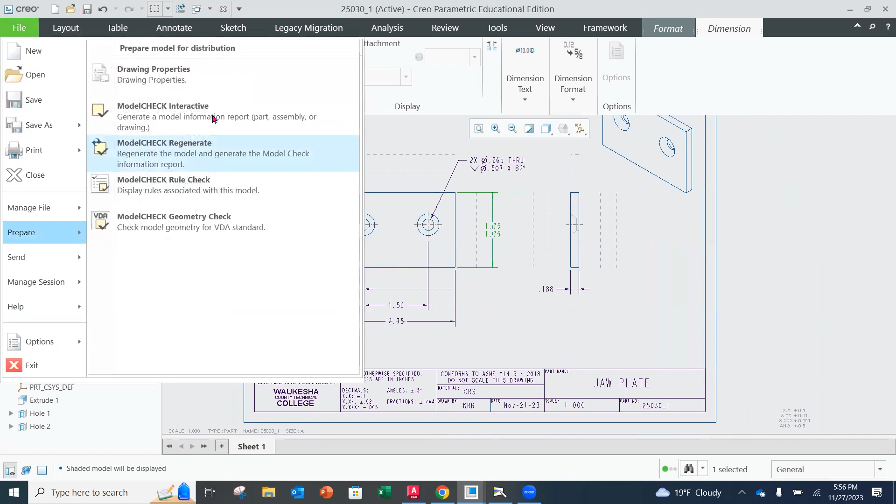So this looks different too? Yeah, that is different. All right, I'll have to come over and look at it. I don't know. Who else has a different tolerance? Spencer, you do? Anybody else? Now, are you on your own laptop or on a computer here? Josh, do you have the same thing? Does yours come up like this? All right. Well, it's no big deal. Yeah, that's kind of crucial. So if you go to limits, for instance, or plus or minus, yeah. I'll have to come over and look at it.

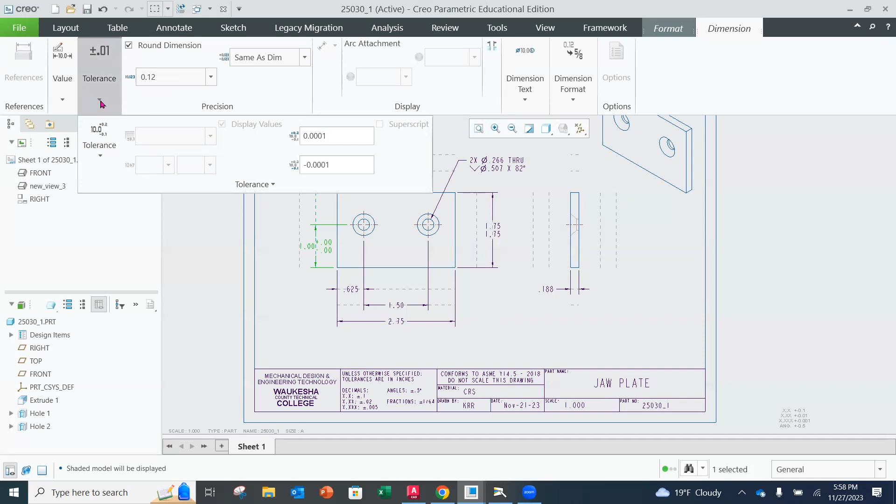Anybody else having any issues with the tolerancing? I'm gonna ask those who are online. Are you guys not seeing the tolerance display over here like this? Or is it all normal to you guys? I can see it. Okay. All right. Then I'll check what's going on in the room here and hopefully we can resolve it. Any other questions? Otherwise, I'll let you guys work independently and I'll answer as they come up.